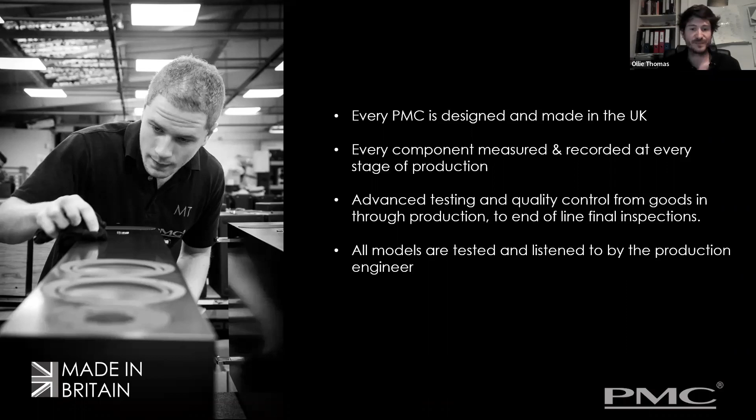Every PMC is designed and made in the UK. Every component is measured and recorded at every stage of production, and it's this obsessive level of quality control which helps us ensure that every speaker we manufacture is the exact same as the first one we ever made. At the end of the product development lifecycle, we end up with reference speakers, one of them representing the exact design goal, what we were trying to achieve. We gauge and measure and compare every single speaker we manufacture from that point forward against this design reference.

So into product development itself. Nowadays at PMC we follow quite a rigid structure for product development. As the company has grown, we have bigger engineering teams, and what comes with that is the need for this structure to make sure everyone is working efficiently and coordinating in the right direction. We want to capture all the requirements for a new product, integrate any burgeoning technologies we may have developed through R&D - specifically what Toby is working on often - and then thoroughly test the product for reliability and get it ready for release.

The big key phases of product development, fairly generic across any design manufacturing company, are shown in front of you: the concept stage, product design and project planning, then the big part in the middle - which Toby will talk us through in more detail - the development process. And towards the end, making sure we get the product ready for manufacturing, test it, and then decide how we're actually going to launch and release it.

All key stages. Timescales for product development is something we talk about a lot internally, and I think a lot of people ask us how long it takes to actually design and develop something. It depends on lots of different factors - where we're starting out, how much time we have at the beginning and end, that concept stage, whether we're developing one product or a whole range, and some of the technical aspects, whether it's a passive speaker or an active speaker, what technologies we might want to apply, and where those technologies are in development.

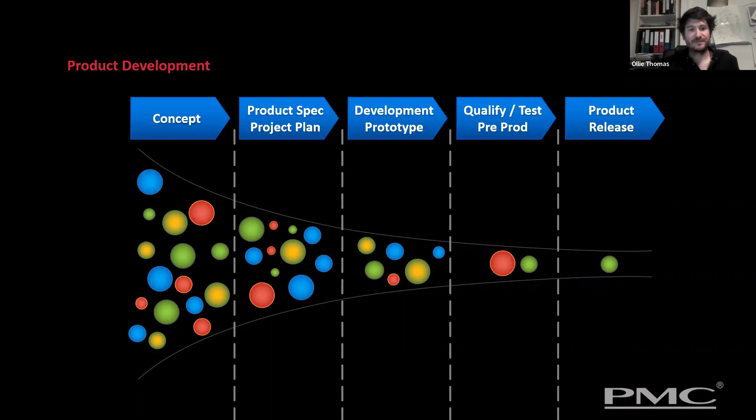So, concept stage. We normally have quite a lot of different concepts floating around. It's often defined by multiple product sketches, sometimes by hand, sometimes 3D modeled and rendered up in CAD.

Also at this stage, we're trying to estimate some of the other specifications which will eventually form the product design spec.

So, this is an example of a hand sketch, and we've got some of the details in there, such as heat sinks and how we're going to manufacture it, different processes and ideas associated with it.

And then many months later, what fell out from this product sketch was the product in the end, which was our AML2 active monitor. This is from many years back.

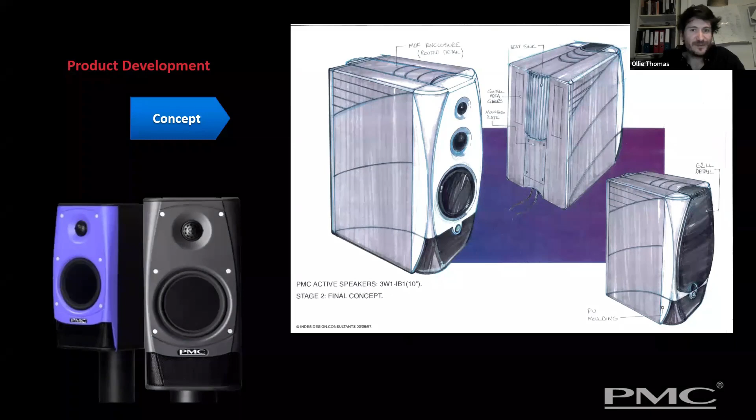So after we've decided which concept bears the most merit, we've got the design spec stage, which is definitely the most important part of any project. It's where we're trying to capture and define exactly what the product is, what we're going to set out to design, and some of the detail into how we're going to go about doing it.

The more detail, the better. A vast amount of detail goes into our product design specs. We want to ensure that we are not only making the right thing, but it's also a measure of the success of our design teams when we get to the final product, to compare how well we've done.

And along the way, we'll need to make compromises, or we'll want to tweak the project, and we come back to this product design spec to make sure that we are doing the right thing and we haven't wandered off.

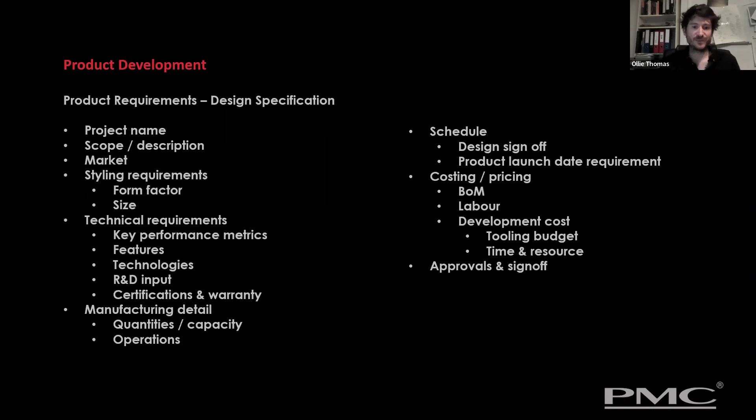Then we've got manufacturing detail, the schedule. Everyone wants to know the schedule. Sadly, costing, pricing, parts, including development costs. And then, but definitely the last bit, which is most important, approvals and sign off, making sure that everyone's bought into this process and agrees.

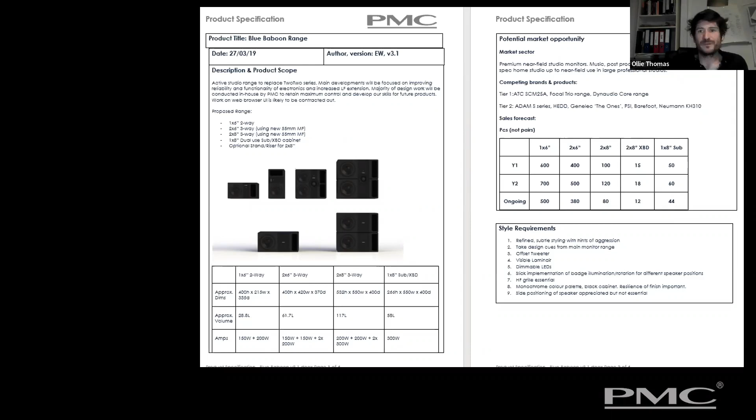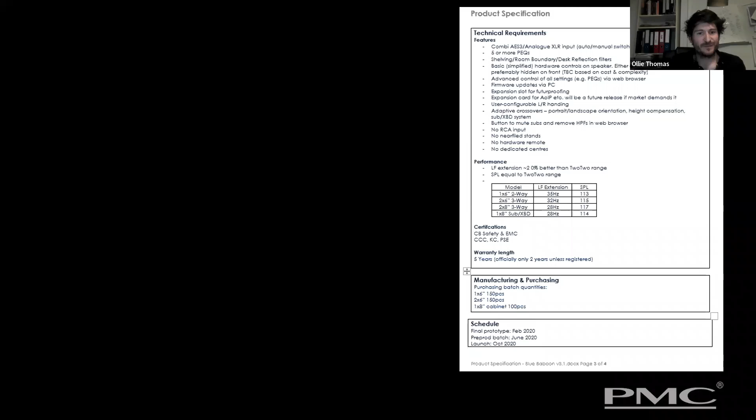So, quick example of a snapshot of a product design spec. We've got some of our concepts in there. We've got some of the approximate dimensions, and we've found what we think some of the market opportunity could be. We've got some style requirements listed out. Then we've got lots of technical requirements. We've got an idea of how we want to manufacture it, and we've thrown in some ideas, all of which will go completely off script, and we won't ever achieve those timelines or the technical brief.

A very good example of one with quite a silly product name as well. It's the Blue Baboon project.

So this is the main bulk of product development. Really, it's getting stuck into developing from our product design spec a product that we have at the end of it, which we can deliver and start manufacturing.

Thinking back to that cone-shaped diagram, this section is possibly the longest stage of the whole project, but it's only one small section in that graph. It's the development and prototyping stage, but it is really the meat of the project.

Sorry to cut in on you there, Ollie. No, you're fine, go for it.

It goes through several stages. Although we're listing them in a specific order, a lot of them will be done concurrently with each other. We're always quite vocal about the fact that because we're doing transmission line design specifically, they can be incredibly fussy about the exact drive unit parameters that go with the cabinet, and the cabinet can be incredibly fussy about the exact drive unit that's with that. They interact with each other in a complex manner and have quite specific requirements on each other. So we end up doing drive unit development and transmission line development, or ATL development, very much in tandem, although they're in different sections.

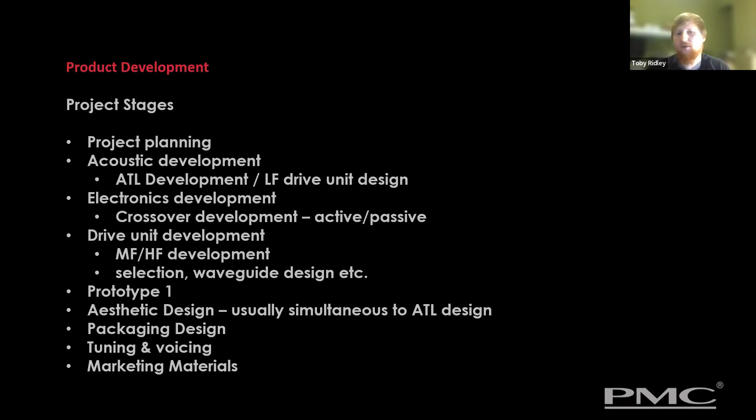Once we've gone through this very early stage prototyping, creating very early stage prototype parts, we'll then get an initial prototype made, which will be to final spec, hopefully, and full visual quality - so it'll have the correct molded parts, machined parts, instead of prototype parts. That'll get signed off on as an aesthetic design.

Then it's onto packaging, final voicing, which would be a little bit more crossover development just to make sure everyone's completely happy, and then creation of marketing materials. That's the early prototyping stage done.

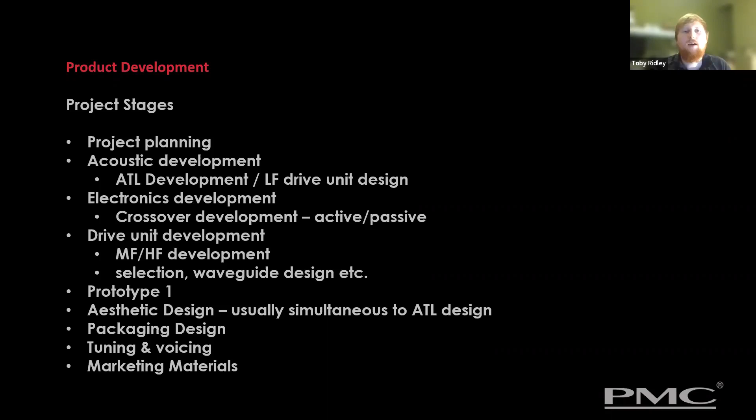We could possibly move forward there.

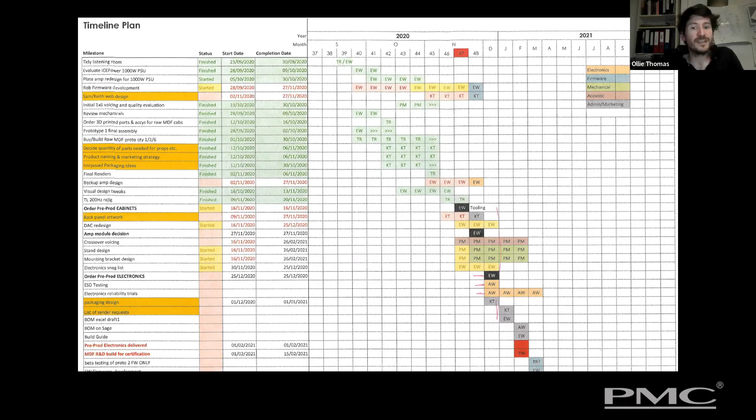To give us an idea, that very first step was the project plan, and this is where our product development manager spends a great deal of time - we pull on his understanding and knowledge to know who is doing what and when. We produce one of these Gantt charts and schedules, assigning tasks to various members of staff, detailing the entire timeline of a project - what tasks are parallel and what need to be sequenced, so we can work from the front end to the back end, or the back end to the front end, to figure out how long it's going to take and how quickly we can get that product to market.

So the next few slides, we'll be going through the first step of the product prototyping stage, which will be ATL development. As it's the core technology for PMC, it's very important that we get it right each time and improve on it each time we make a new product. We spend an awful lot of time at the front end of every project working on this, in tandem with drive unit design.

The procedure we go through isn't entirely rigid, but generally it starts with initial back of envelope calculations. We've also got spreadsheets and scripts that do rough calculations on transmission line length for what our target frequency is, various cross-sectional area calculations to give vague ideas of what we should be starting with for given drive unit parameters. From there, we'll go on to much more complex simulations using FEA tools like COMSOL. We'll then create prototypes following successful simulations, and start tweaking on those prototypes and go on from there.

I didn't know if you wanted to talk through the images that we have in front of us - some of our beautiful...

This is what we call an acoustic prototype. I don't know if we've already covered that, but we've got an idea of the transmission line, the enclosure, how it's acoustically working, and some of the drive unit development itself. Of course, we wouldn't dare show this to perhaps the sales and marketing team.

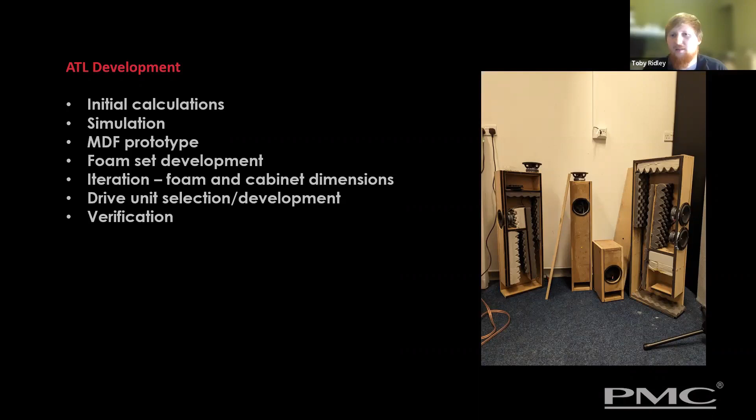So we've done initial calculations and we'll move on to simulations in COMSOL. We use COMSOL for a variety of different purposes - everything from high frequency drive unit simulations, waveguide design, to simulating entire cabinets with drive units in them, to make sure that we're going to get roughly the performance that we expect from that cabinet design.

So I've got a couple of example images here. One is just a surface plot of SPL being produced from a quite extreme baffle profile of a tweeter. It's not something we are actually going to use or would use, but it's fun to try these things out because it's free to try in COMSOL.

I think that's what's so amazing about having access to these simulation tools - you can try really outlandish things that even with rapid prototyping today, you would still not want to waste time on necessarily, but you never know, it might work out and become something quite special. So it's worth trying some of these slightly rogue ideas that might cross your mind.

Another example we've got is actually a subwoofer design that we've on the sly produced for a few studios around the world, which is a very high performing 15-inch subwoofer. It started off in COMSOL simulations where it showed enormous promise, and we went from there and built some prototypes and ended up selling them.

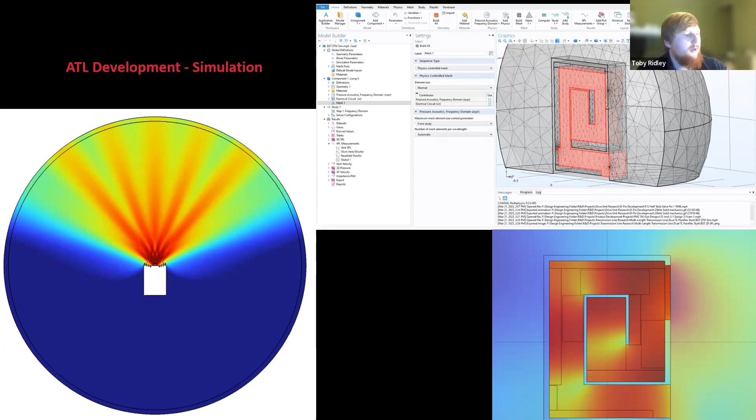And what's quite fun, if we go on to the next slide, is that those of you who are quite well versed in acoustics should know that there's obviously frequency domain and time domain ways of looking at any acoustic problem. COMSOL lets us look at both of those domains in quite high detail.

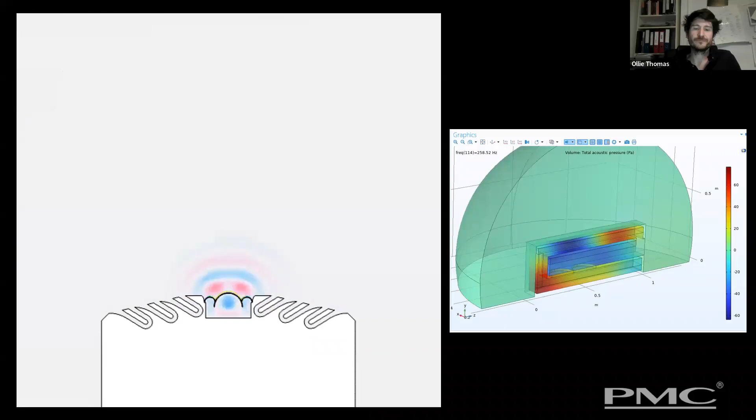So this is now a time domain simulation of a tweeter moving at 20 kilohertz, again quite an extreme waveguide profile. But it enables us to see how the drive units are behaving over time, and see the mechanical and acoustic interactions that would be going on in that system.

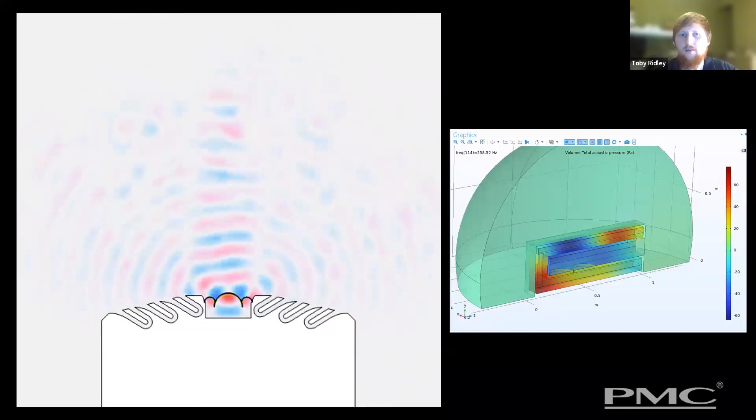So again, talking back to the benefit of having access to these tools - if we go back not that many years, it was almost impossible to run simulations for these things. So if you wanted to see how a design was functioning acoustically and get a really good in-depth idea of how it was performing and how the sound was behaving around a cabinet, you had to try and find a way of measuring it. So I'll pass back up to Ollie for the next few slides, which is quite an interesting project that we did before my time, which Ollie led.

Yeah, sure. And the major reason I like to bring this up is I get to see acousto-optic laser-based interferometry, which is always fun. But this was some research that we did in conjunction with the National Physical Laboratory quite a lot of years ago now.

They were sort of developing a technology, and they were looking for someone with design and industry understanding and knowledge to be able to apply it.

Essentially, what the measurement technique is, is taking a scanning laser device and shining it across the front of the speaker, not actually physically touching the speaker, but shining it through the air just in front of the speaker, off of a reflective board on the other side of the measurement area, and then recapturing the laser on its return.

So it's an automatic laser scanning device, and it moves the laser through this kind of 2D plane sound field in front of the speaker, and is essentially measuring the time of flight of the laser.

And if you shine that across the speaker when there's no sound playing and when there's sound emanating from the front of the speaker cabinet, you'll see a very tiny difference in the time of flight of that laser. What that is, is the sound pressure in front of the speaker causing a change in refractive index in the air, and it bends that laser light.

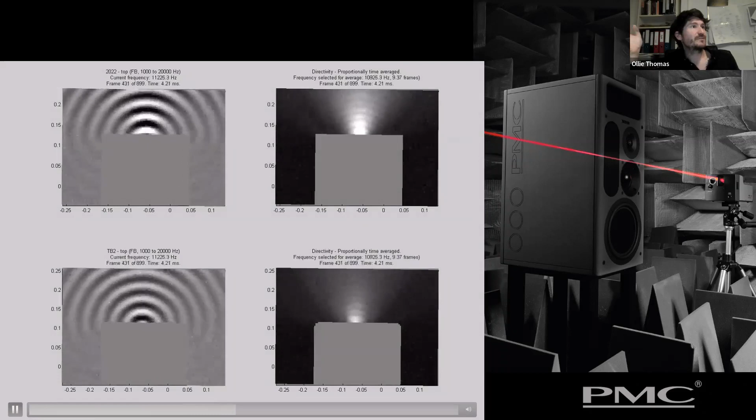So this, what you're looking at in front of you, needs a bit of explanation. The left-hand side two video screens are showing essentially a comparable speaker from the top-down view, showing one with a very sharp-edged cabinet and one with a slightly rounded over cabinet.

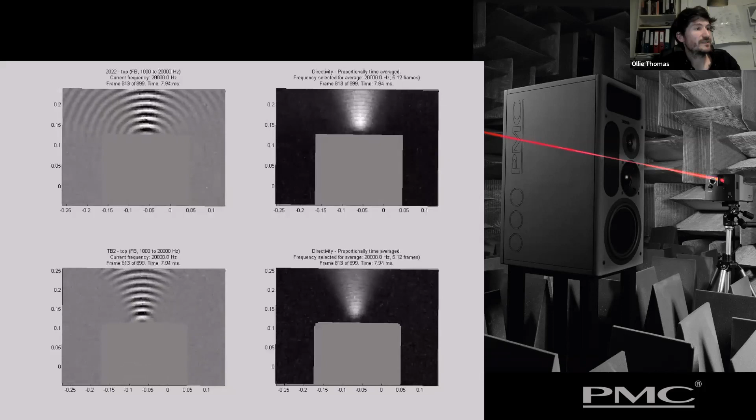I'll play it again. We've got frequency and proportionally time average directivity. But just focusing on the images on the left, you can take away a few different things, but you can very much see how the sound wave reacts to the edge of the baffle, and it shows a basic acoustic principle of diffraction. We did use it as a useful tool to help direct us towards seeing what the impact was of some of the different geometries that we use in cabinet design and waveguides.

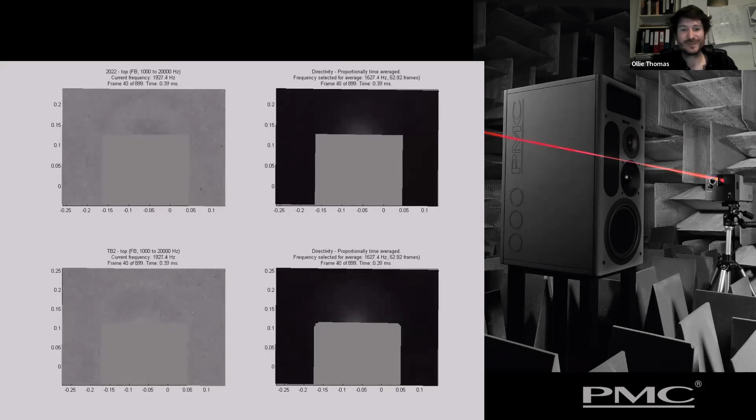But as Toby rightly pointed out, it's all completely out of date now, and we don't need it because we have powerful simulation tools which do it for us. And this was just us generating a 3D visual of incredibly limited resolution. But it's nice to literally see sound.

Yeah, it's quite amazing that you can actually visualize the sound waves. It's not a simulation, that's an actual measured thing, which is very, very cool. But it's nice that we can do similar things a lot cheaper now. Obviously, the benefit of this is you don't have to worry about the validity of it as much.

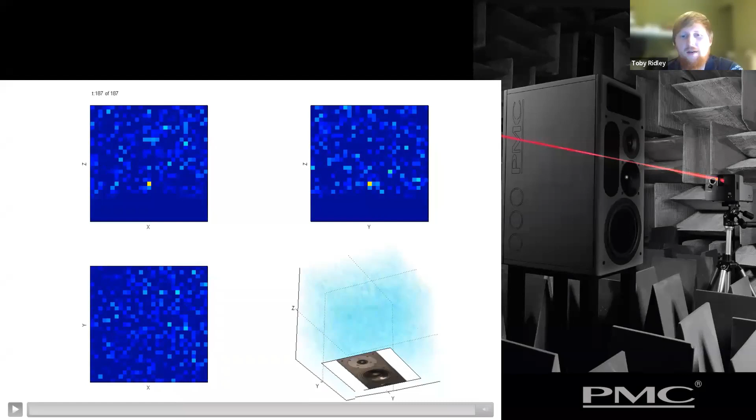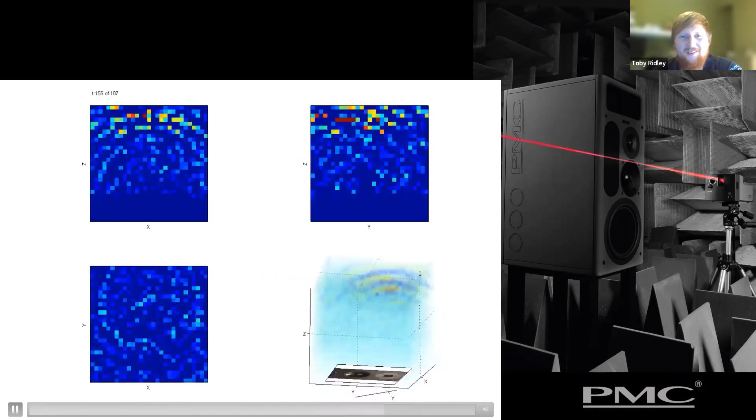With simulations, you're always very much focused on how valid your simulation is, is it accurate, and having to verify it against real measurements. With something like this, obviously, this is the real measurement, so there is that benefit. But the cost and the speed and everything is remarkably better with simulation tools, and we can just keep trying new things very rapidly.

So back to simulation tools. When we're simulating an entire cabinet, the sort of data we can get out of that - we can look at predicted pressure or sound pressure level at different places all around the speaker, so we can place it in different acoustic environments, but half space, full space, things like that.

We can see how the drive unit and the vent might sum at a certain distance at a certain angle and things like that, to check that we aren't getting any strange phase or likely to get any strange phase interactions between the two. We can look at the air velocity at any point within the cabinet, or outside the cabinet. We can look at driver excursion, electrical impedance.

Taking it further, we can look at mechanical flexing of parts, so cabinet sides, see if there's going to be any issues with cabinet resonances or drive unit breakup modes and things like that. So that's super helpful to get a good grasp of whether any of these things are going to cause issues, or whether we're likely to hit our targets for these parameters before we've even cut any wood. So that's very handy.

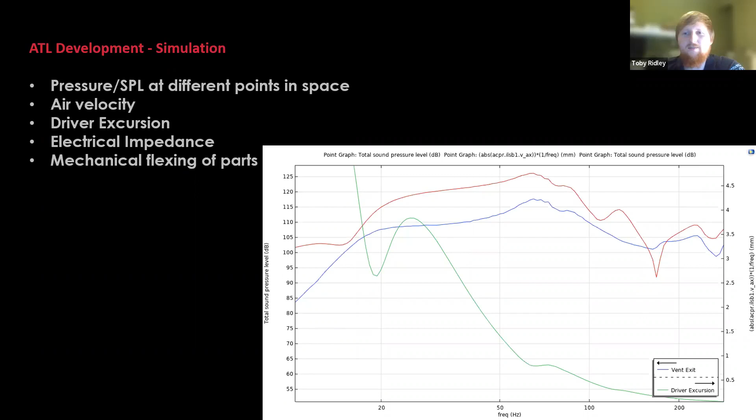So obviously the most important thing with simulations is that you can verify that they're accurate. So the next step is to build a prototype of what you've simulated and make sure that what you can measure is indeed what you simulated. That gives you good confidence that future simulations will also tally with reality, and it means we know we built this prototype correctly, which is also a bit of a worry sometimes if it's being done by hand or in a rush.

Obviously, drive unit parameters can sometimes not be what you're promised. We do measure these ourselves, but things can change. So measuring is extremely important. You need to know the reality of what your cabinet or speaker is producing.

It lets us, by iteratively taking suites of measurements, repeatable suites of measurements, compare different designs. We have two different prototype ideas on the go, or comparing against a reference unit. It lets us rapidly improve our designs by making a small change, measuring it, making a small change, measuring it. And also to confirm the results of listening tests.

We've mentioned many things that are our core philosophies, but one of our big core philosophies is that listening to our designs is just as important as measuring the designs. In fact, they're equally as important. So we never rely solely on either listening or measuring with any part of the design. We are always listening, even if it's just a bass part of a cabinet, just a woofer in a transmission line. We'll be listening to that, be it crossed over or whatever.

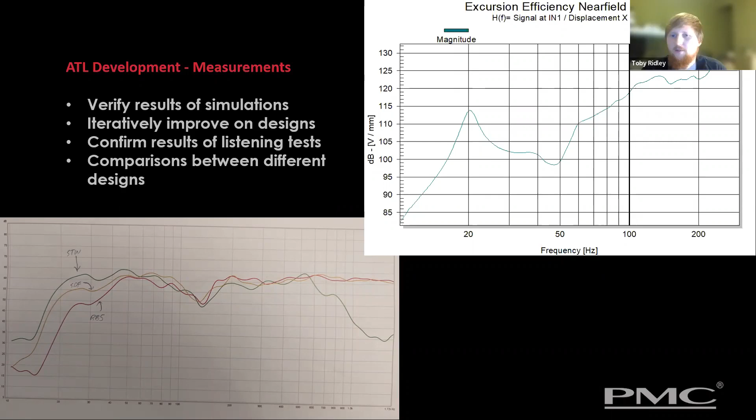Sure. So this is just a fun little video of running a sweep, doing an excursion efficiency measurement within our semi-anechoic chamber of a 2523 speaker, which happened to be what I had to hand.

So yeah, you can see the laser, which is pointed directly at the surface of the drive unit cone, measuring the distance, so measuring displacement. And then at the other end we've got our B&K microphone near field to the vent, measuring the acoustic output from the vent, and then inside Klippel it correlates the two measurements and gets a metric of acoustic output for a given driver displacement.

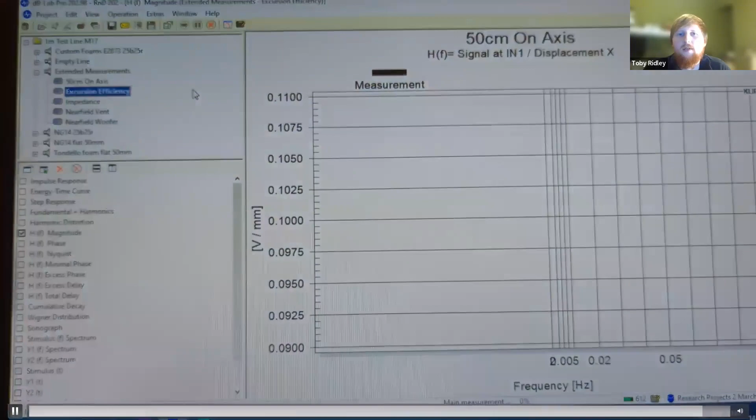Obviously I was impatient and didn't wait for the measurement to display there. Sorry about that.

So a few things about measurements. Similar to simulations, you need to make sure that your measurement is valid. It's easy to point a microphone at any point of a speaker and say, oh, that's the sound the speaker's outputting, and trust it completely. You can be completely wildly inaccurate in that assertion.

You need to make sure that you're measuring the speaker in the correct environment. Usually, unless you're doing system tuning, you don't want to measure the room's response to that speaker. You want generally to have a measure of the direct sound produced by that speaker at the measurement location. Generally, you can only measure at a single location in space at a single time, but you don't want anything interacting with that.

So obviously, the easiest way of achieving that is to measure inside an anechoic chamber. At PMC, we are a small company, and unfortunately we don't have access to a full anechoic chamber ourselves. We've got semi-anechoic, which is anechoic down to about 200 hertz-ish, and is suitable for most of our needs. If we do need further accurate measurements of the low frequency part of our speakers, we could go outside and do ground plane measurements, which is another very accurate way of removing the room because you have no room.

You have to make sure that you're measuring appropriate things for what you're trying to find out. There's no point running a super high frequency sweep on a woofer if you're trying to measure how its low frequency output behaves. You also need to make sure that you're measuring in the right location and getting the appropriate information. Seems like a small and obvious point, but it can be quite easy to waste an awful lot of time taking a whole suite of measurements that are irrelevant to what you're trying to find out.

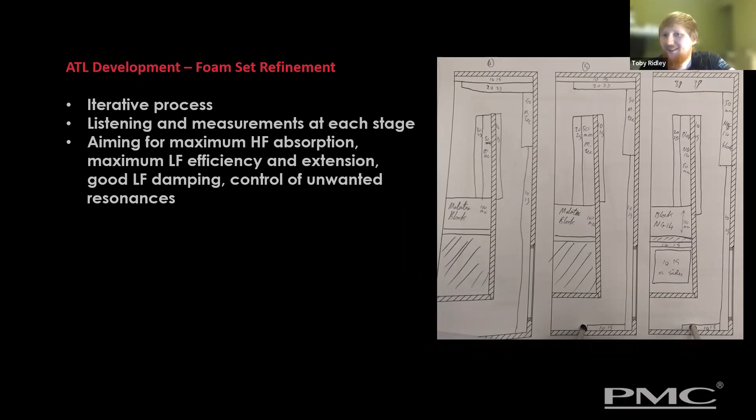But in another set of circumstances with another drive unit, it might have benefited the transmission line. So it's worth trying. It's a long process, but worth doing.

So moving on from once we've finalised the foam set, the transmission line design, the woofer design and development, the next stage would be mid and high frequency drivers.

We will sample many options from different suppliers, different OEM suppliers. We have a couple that we also manufacture in-house, which we will obviously try and look at. We try to at least customize any part that we buy in to make sure it suits our requirements exactly. So there's a lot of modification of drive units that happens, be it cosmetic or performance based.

So for that there will be a lot of custom parts, a lot of prototype parts. We'll move on shortly to how we do the prototyping, and then we'll verify and make sure it's all good. So for prototyping in-house, obviously we make use of 3D printers.

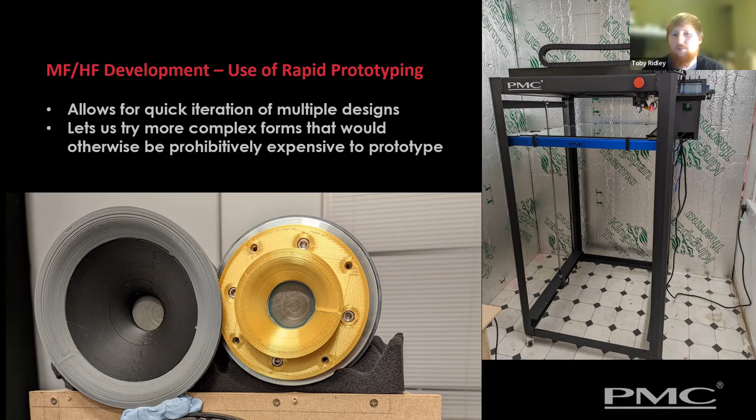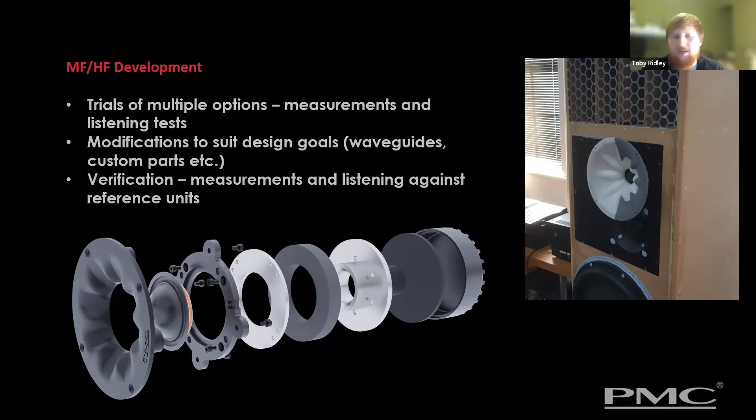So during mid-range and high-frequency driver development, we come back around to one of the PMC core concepts, which is we like wide directivity and smooth directivity from our loudspeakers. It's so important to getting a natural, neutral sound from a loudspeaker. I think it sometimes gets forgotten that you don't just hear the sound that comes from a loudspeaker directly to your ears. You're hearing all the sound that gets radiated in all directions, then reverberating around your room, and eventually finding its way back to your ears.

And we think it's so important that the sound that is reflected off a wall, certainly the first reflections off a wall, don't have a really peculiar frequency response, very different to the on-axis sound you're directly hearing. I think your ears pick up a very modified, delayed signal from a sidewall as quite a strange anomaly to the sound, which can really affect how you're perceiving space and imaging in 3D space of the sound field.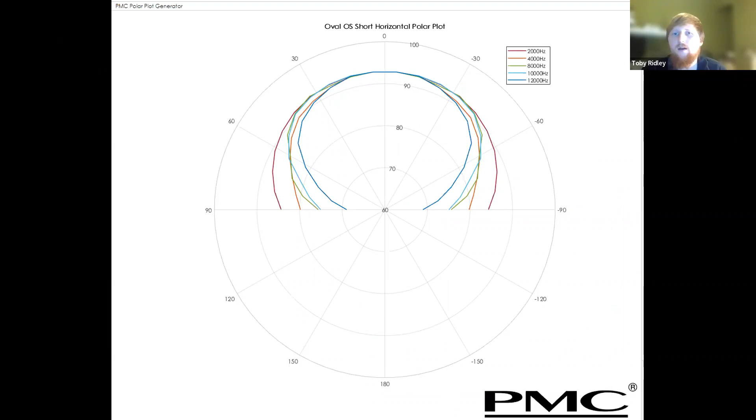So if we move onwards again, that can then be displayed as a polar plot like this. It's just another way of visualizing that same data, which makes it very easy to see, in space around that driver, how it is projecting sound.

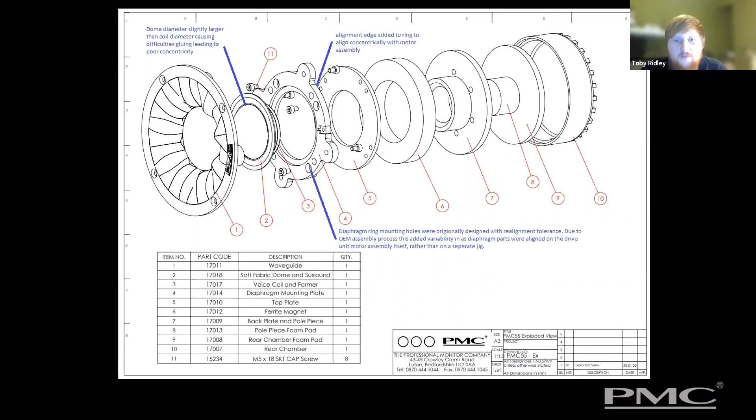So this slide is just showing a cutaway and exploded diagram of that same PMC 55 mid-range driver. Just an interesting visual that, I believe, was handed off to manufacturing.

Onto crossover development. Another enormous task to overcome as part of the development of the speaker, and probably arguably the most important. I always say you can take the best cabinet design, the best drive unit designs, and make the most disgusting sounding loudspeaker with a bad crossover. It's the one way you can ruin every other thing you've done in the loudspeaker development process.

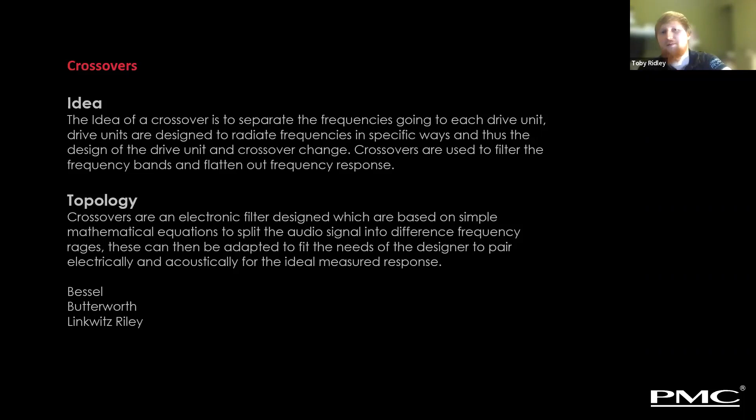Opposite to that, a tweeter, a high frequency driver - try and play 20 hertz at large output levels from a tweeter and it will explode very quickly. So a crossover's role is to only send the frequency bands to each drive unit that they are happy playing and perform well whilst playing, and to manage the phase and frequency relationships between these to make sure they work optimally.

There are two forms of crossover. There's a passive crossover, which uses passive components and doesn't have any power requirements. You would feed it with a single amplified signal, and then it splits using inductors, capacitors, and resistors. It will split that signal into appropriate signals for individual drivers. It gives you the option to use your own amplifiers and your own outboard equipment that you might want to use, and to upgrade your system down the line, which is nice.

There are issues with passive crossovers in that you can get inductors coupling to each other, causing the signal from one driver to leap over to the signal of another driver, which is a very odd phenomenon. You can get poor electrical damping of the drivers, because it's going through essentially like a sponge electrically, so as the components react in different ways to the signal, you don't get good direct control from the amplifier to the drive units, and you can't implement limiters and things like that for driver protection.

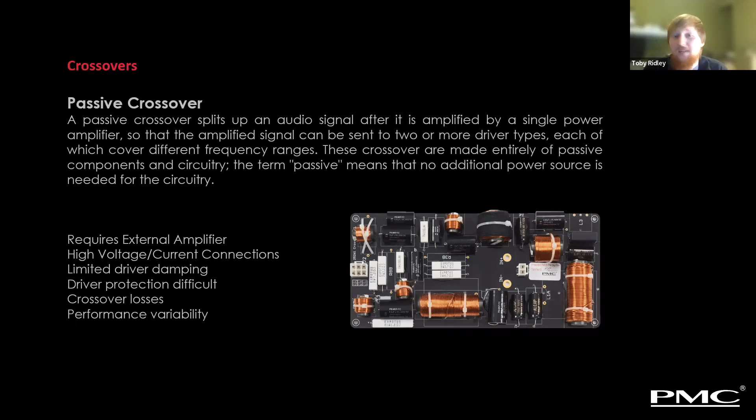So there are issues - apart from that, they're great. Yes, but they are by far and away the most common type of crossover you see, because if done well, you can mitigate almost all of those issues and they can sound excellent.

However, if the customer wants it and the budget allows, an active crossover can be a preferred option, where a signal level crossover is implemented. It can be analog or digital, but the crossover is done before the power amplifier. So you have an individual power amplifier channel for every drive unit, and the signal fed to that amplifier has already been processed to band limit it. This gives you massive control over the individual drive units, because there's a direct coupling between the amplifier and the driver. With DSP crossovers you can do much more complex filter design very easily and cheaply.

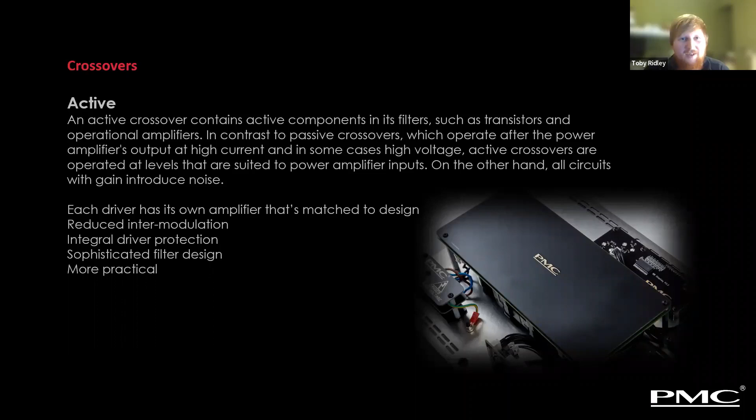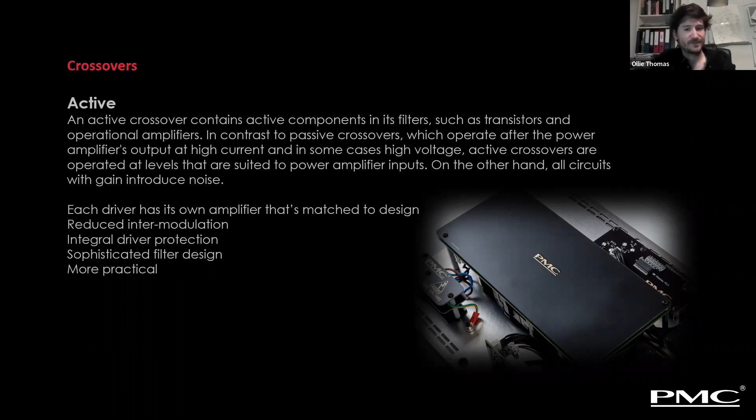You can do time alignment and things like that, and you can also integrate limiters to make sure the drivers don't go bang when people turn the volume up too much, which is great for studio use because people do like to play it loud sometimes. I think it's fair to say we see a greater focus on active crossovers for the studio products and passive crossovers for our hi-fi products. It's about finding the right solution for each individual application.

This stage of the aesthetic design is done in tandem with everything else, because as I mentioned at the start, we're always doing design concept sketches and renders, and as you're building up simulations, the simulation has to be done with a 3D model, so there's always a working model of what the speaker's looking like and the direction it's heading. This is constantly being iterated on by various people along the development process.

We'll consult with marketing and sales teams to see what design aesthetic they would prefer and what they think is going to be appropriate for that market. We'll look at what other people in the market are doing at the moment, and what interior design trends are happening, to see what's likely to fit with people's homes or studios.

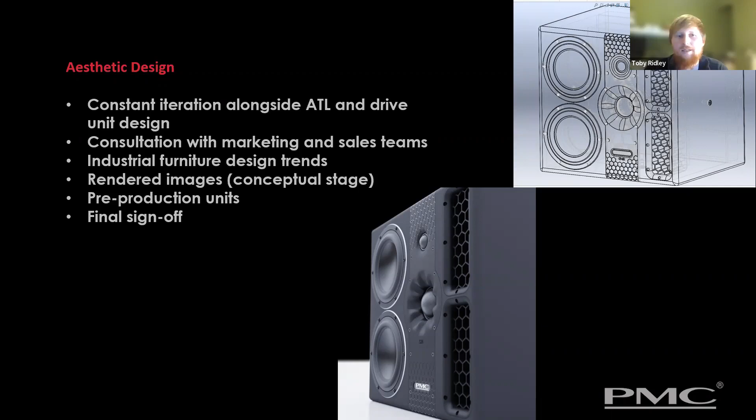As we approach a final design, we'll start creating more high quality renders like you see at the bottom of the screen. Then, once we've got final sign off of the design, the pre-production units will be produced to the final aesthetic quality. After that, it's final sign off of the speaker, because we've gone through the whole development process, which is fun. This is where Ollie comes back in and goes through that.

Toby's walked us through the in-depth steps of the product development. We'll then get together as a team and compare what we've designed against the product design spec and sign off on it, with a meeting and a sign-off document to couple with it.

I've just thrown in here the next step, going into pre-production, where we are producing a small batch of the product and getting ourselves ready for manufacturing. We'll have checklists like this, which anyone is allowed to scribble on, from our technical production assemblers who are trying out what we've done in terms of build guides, test guides, jigs and fixtures, and making sure our bill of material is correct.

We'll have an out-of-box experience session to make sure that everything down to the packaging fits and feels right. Then we'll start evaluating our pricing and costs, and noting down any design modifications that might come from the practical element of initial assembly. It'll be a small batch build, but representative of what we're going to be going into with main production.

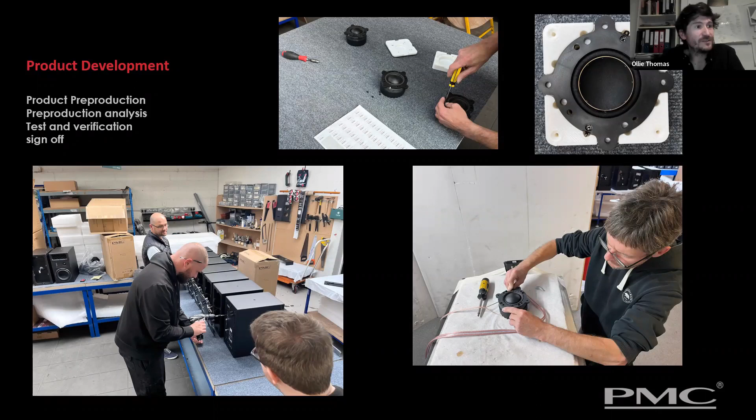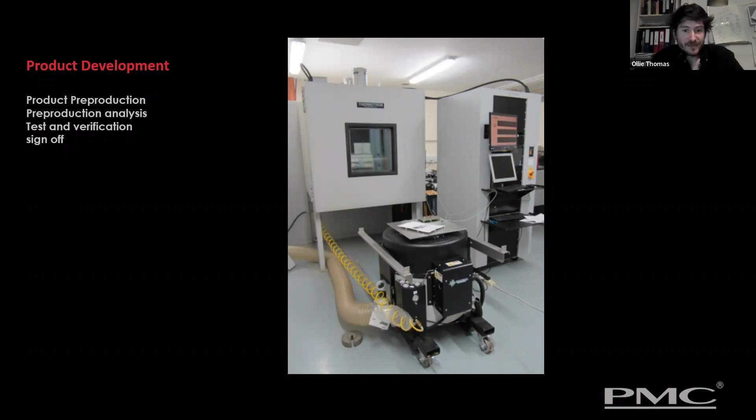Then we've got things like product release information. We start to look at what we're going to publish about our products, what measurements, what spec sheets we should be publishing, which will help people choose what product is best for them. There's a bit of difficulty with every company doing this differently.

I think that's beyond just the audio world, with any product design and manufacturer. We try and choose carefully not to cause confusion with people comparing specs from different companies that might not really be representative because of the way they're measured, or the way that any specification can be manipulated.

So, example specifications for some of our new pro products would be publishing directivity plots, as we feel that's an important metric, along with things like max and peak SPL, always important, and a reasonably helpful measurement to help you choose what size speaker fits what size acoustic space, what size studio.

And then we want to go to launch, release the products, possibly at a trade show, organizing photography and other materials around how we're going to sell and market the products. It's nice to utilize a global trade show to synchronize the launch and get the product information out there into multiple markets all at the same time.

And then the final stages are rolling into main production. I'm sure, like every company, you carry forward a few little difficulties into that first production run, and there's quite a lot of engineering emphasis to ensure that goes as smoothly as possible.

And then the final thing, which is kind of critical in any project, is a wash-up meeting where we get together and review the project from start to end, what went well, what didn't, so we learn and make sure the next one is even better.

I think at that stage it's probably best if we end there. I thank Mike and Sue and Neil and AES again for giving us the time to talk. Yeah, thanks very much.